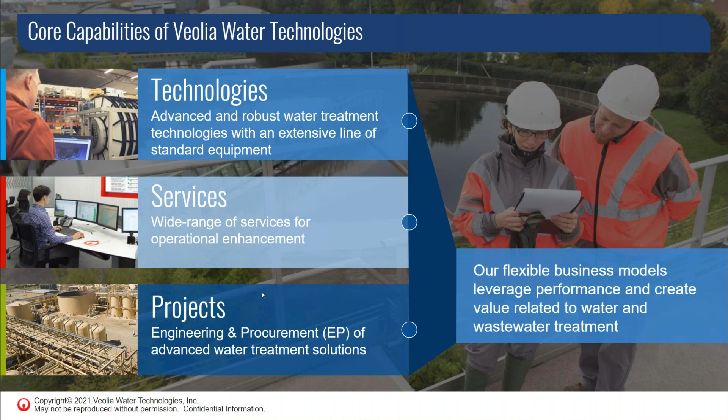When you look at our projects, we have various delivery models, really nothing cast in stone. The big focus is on engineering and procurement of our treatment systems, but again, we have many delivery models that we can bring to the marketplace. Next slide, please.

When you look at markets served, certainly today we're focused on the mining sector, and myself personally involved in mining right across North America. But as Jill mentioned before, we're also included in oil and gas, municipal. We look at pharma and food and beverage as more what we call our light industry, but also power and pulp and paper as well.

So we really do cross all the markets here in North America, and we certainly do look forward to the opportunity of working with you and seeing where we can help you out. And with that, next slide, please.

So for today's agenda, we are going to look at metals precipitation, low-level metals precipitation in mine water applications. Mark is going to take over from here and talk about the conventional water treatment plants and how we look at that from an applicable process for metals removal, the principles behind how we're proposing our water treatment facilities.

We're going to look at a couple of case studies, mine effluent treatment in northern British Columbia, Canada, and talk about how we tackled that specific application. We're also going to touch briefly on a remediation case study, where copper and zinc were involved at an abandoned ore spill site. And then we'll wrap up with a conclusion.

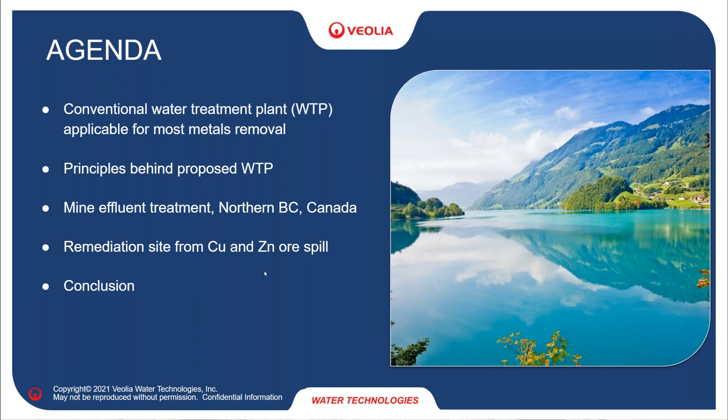So water treatment mining application, we're focusing today on sites that have to deal with excess water. I understand right now most of the southwestern US is in a drought, but actually we see that we have many locations where there is too much water to deal with, and where that water is contaminated typically by heavy metals, by TSS, the particulate solids and everything, and must be treated before discharge into the environment.

We see that the criteria to discharge into the environment are becoming more and more stringent. It's not the same all over North America, but we see that in some places levels are expected to be in the ppb, the micrograms per liter. That's not a lot. What we're going to cover today is two case studies of how we can manage to do that. We understand that it does vary from site to site, but I believe it will give you a good idea in general of how we go about that.

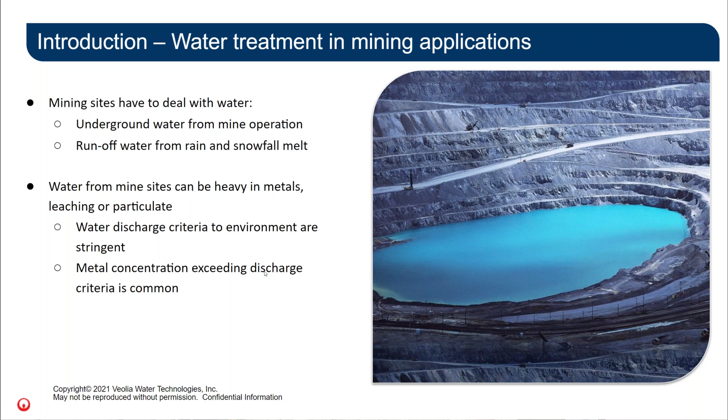So what we're looking at today is conventional treatment chain for metal removals. It's not the only thing we can do, and as Jill mentioned in the intro, we are also looking at biological processes. Biological processes are not used that much for metals—they're more used for ammonia, nitrogen, or in general organics. We're not covering that today.

We have covered that elsewhere, but just so that you know, it is part of the treatment. Today we're focusing on metal removal—how do we go about removing all those metals coming from mining sites?

So basically, when we're talking about metal removal, we will be talking about physical chemical treatment, which is basically we'll do something chemically to do a precipitation, and then we'll just use basic physics to remove the solids, and that's what we call physical chemical. That's as opposed to biological treatment, which is not covered today.

It's simple. It's quite flexible because you have a wide variety of chemicals to use. You can also be quite selective depending on what you have to remove—you can go there and actually be fairly specific. You will have little or no liquid waste. Normally what you're producing is a sludge.

That sludge, on the other hand, needs to be handled. That sludge is usually considered to be toxic waste because it does contain most of the heavy metals removed from the water. Chemical consumption can be high depending on the water quality and the criteria we have to meet. It's still fairly simple, and we can achieve surprisingly low concentrations in the treated water if we do our job properly—select the right equipment, the right chemicals. That's basically what we're going to see today.

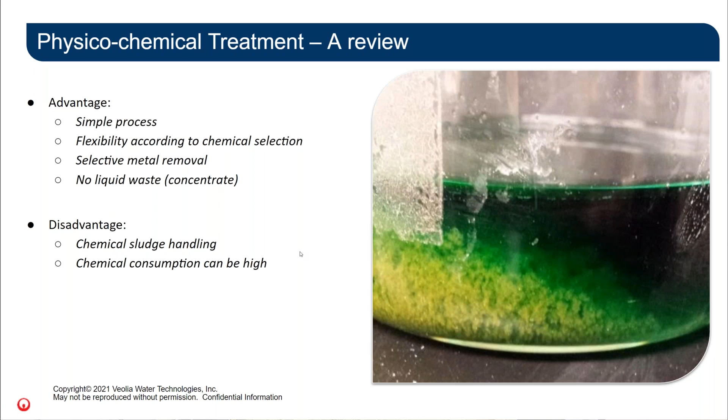So what's the idea there? Metal precipitation. We have something soluble, some soluble metal ions, and then we'll add something else to form solids. That's going to be precipitation.

What are the something else? Typically hydroxides. I'd say that's probably 80 to 90% of the cases. You would just basically add caustic or lime or something like that. But it can also be sulfides, carbonates, sulfates, oxides. There's all kinds, not to mention various organic chelatants and things like that.

We can also use surface complexation. I'm not going to spend a lot of time on surface complexation because that's a topic by itself, but the idea is that when we add aluminum or iron into water, and that aluminum salt or iron salt precipitates, it forms a solid, and that solid has a tendency to adsorb many metals. That's actually the main mechanism we use to remove oxyanions, such as chromates, molybdates, vanadates, arsenates.

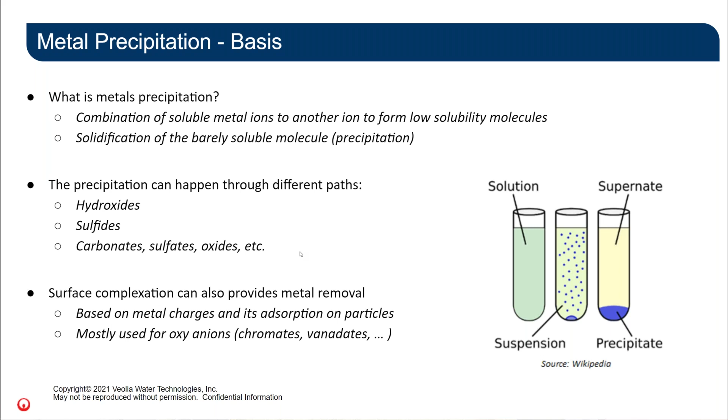All those oxyanions are typically removed using surface complexation. At the end of the day, whether I use precipitation or surface complexation, what I end up with is a solid that contains the metals that I want to remove. So once that's done, I have to remove the solids from water, because it's good to take the metals from the aqueous phase and put that into a solid phase. But at the end of the day, I must now remove my solids from my water.

Typically, the main workhorse that we use is something we call ActiFlo. ActiFlo is a clarification process that is based on enhanced flocculation using ballasted floc. What does that mean? That means we're adding sand, micro sand, into the process. We'll bind the solids that we just produced by precipitation or surface complexation to the sand using a combination of coagulant and polymer. And now we're suddenly going to have solids that are much bigger and much denser than before. They will be able to settle very, very fast.

We're talking order of magnitude faster than naturally decanting solids. Obviously, all the sand that we add is recovered. Basically, what we found is that the sand-solid mixture can be pumped and sent to a cyclone. In the cyclone, the centrifuge force is sufficient to separate the sand, which is recovered, from the solids that we produce, which now make up the sludge.

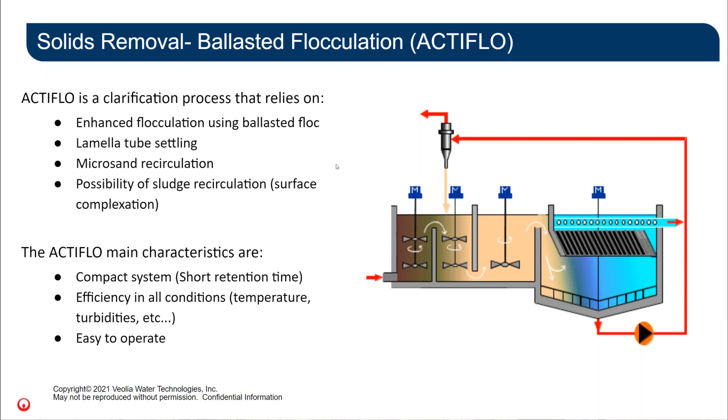The ActiFlo typically is 20 times smaller than a conventional process. This is something where we have literally hundreds of applications worldwide. It is very, very effective for that.

It does produce quite a good quality effluent, typically much better than the conventional clarifier, because you don't have the issues that you have with turbulence in conventional clarifiers. For example, the sun rising through the day will create a convection current that will give you an increase in TSS and so on. You don't have that at all in ActiFlo. So probably, as I say, 95% of the mine sites where we have a treatment plant have an ActiFlo at some point in their process.

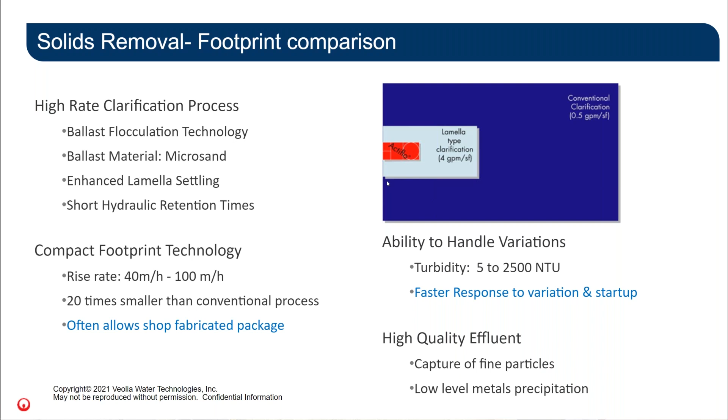So what we found is that by combining ACTIFLO with a disc filter, we can increase the solid removal efficiency of the system by roughly a factor of 2 to 3 - 3 would be pretty typical. With that reduction, the TSS going out would typically be around 3, maybe 3.5 milligrams per liter. That gives you that much more capability to remove TSS and hence to meet your total metal criteria out of the system.

This filter is a system where you have many discs in parallel. We typically use a 10 micron filter. As I say, it normally reduces TSS from 8 to 12 out of the ACTIFLO to about 3, maybe 4, after treatment.

It's gravity operation, it is very compact. If the ACTIFLO is compact, I think the disc filter is even more compact than the ACTIFLO. Super easy to use. It doesn't produce a lot of backwash, and the nice thing is that if we have a disc filter downstream of an ACTIFLO, the backwash from the disc filter can be sent back into the ACTIFLO and will be further concentrated. So basically there's no net loss of water out of a disc filter.

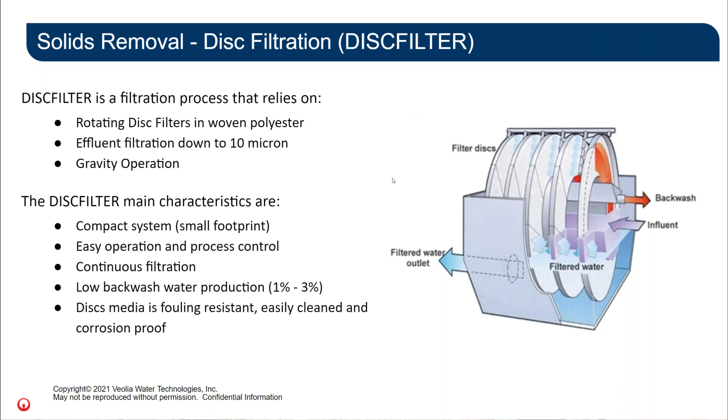It is fouling resistant, it is easily cleaned, and it's corrosion proof in the sense that it can be built in pretty much any material you can imagine. So we can usually find a material suitable for the application. Not to mean that every material, every disc filter is suitable for every application, but we can typically design a disc filter to fit. And stuff like chlorides, as an example, are things that we do very routinely - that's actually quite easy.

I've covered the basics. As I said, I'm not going to go into much more detail - we do not have a lot of time. There are things I went through very fast, like biological treatment, surface complexation, but I think that for now it gives you an idea.

I'm going to cover two different case studies. The first one is a mine that is in operation in northwest BC. What we're going to show is the results of 3 years of operation. So that's an underground gold mine. It is a very remote location - you need to travel over a glacier to actually go there. It's also very limited; the site, as you see in the photo, is cut between mountains and a lake, and there was actually very little land for the client to build infrastructure. So that's actually one of the reasons the client came to us, because they were really looking at a compact water treatment system, and also the discharge limitation, which we're going to show very shortly.

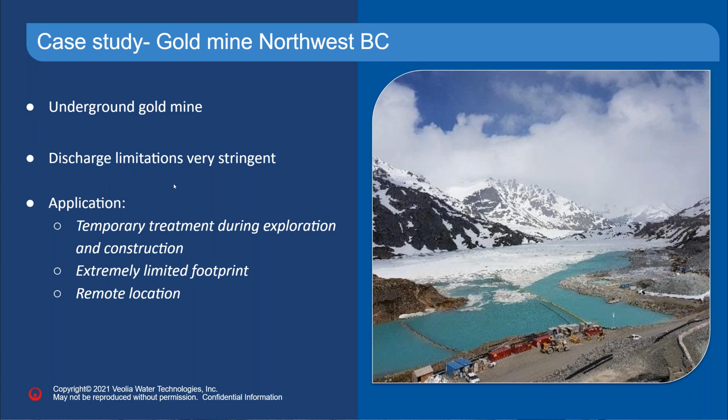Discharge criteria are very stringent. It is a pristine environment, discharging into Alaska. So there was also the complication that because the watershed actually crossed an international boundary, EPA was involved and everything. So it was kind of a difficult site.

So what we went in with there, as I said, was ACTIFLO for metal removal, disc filter for filtration. We had a breakpoint chlorination system - the reason for that was because we had a nitrite criteria; nitrite NO2 is not removed by precipitation, and breakpoint chlorination actually deals with that. Capacity is 6,000 cubic meters per day. That's a moderate plant for us, roughly 1,000 gallons per minute, just for my American colleagues, just to give you an idea.

Metal precipitation using precipitation hydroxides, and metal adsorbed by surface complexation and the disc filter. If you look, you've got various parameters there - you have the criteria we had to meet, and as I said, some of those criteria, like 0.12 microgram per liter for cadmium, or 0.1 microgram per liter for silver, or 2.5 microgram per liter for lead, are actually fairly strict.

Some of the metals are removed by precipitation, like copper and cobalt. Some of them are removed by surface complexation, in this case arsenic and cadmium come to mind. I think that's about it.

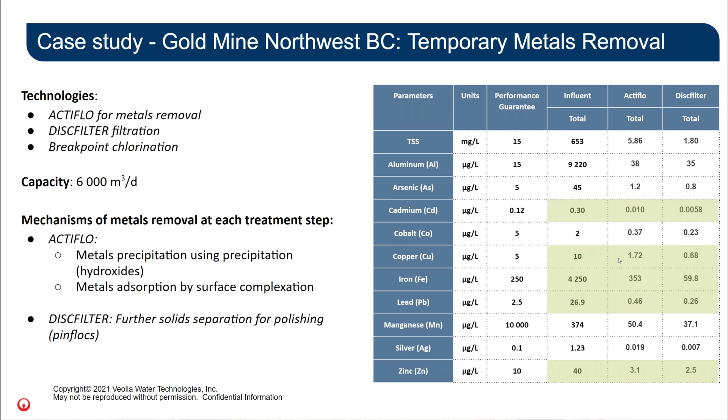Even if there is an upset in the operation of the ACTIFLO, because of some kind of mechanical failure or whatever it is, this filter is there. It's kind of catching errors, basically acting as a goalie, making sure the client can sleep at night and easily meet their criteria.

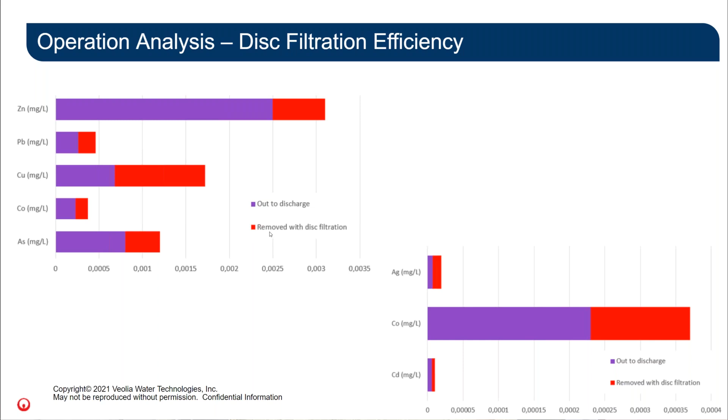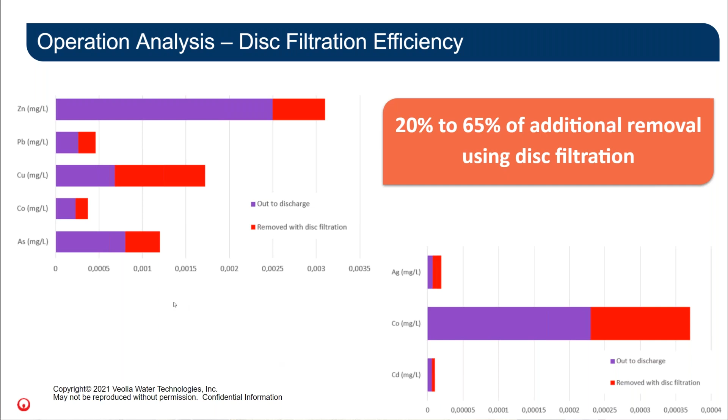Let's just look at what this filter is doing, and that's what this next slide shows. We can see that the disk filter actually removes a fairly good part of what is left after the ACTIFLO. Depending on the metal, like zinc, maybe a little less, like 20%, but in some places like copper, it's more like 65%. Silver is also closer to 65%. Cadmium is about half and half. So you can see that the disk filter is fairly effective at doing that final polish to make sure we are meeting the discharge criteria.

Conclusion for that case study: very, very robust performance. The feed water, I didn't mention, I apologize, I forgot about that. Feed water was extremely high in solids, repeatedly above 10,000 milligrams per liter, that's 1% solids. It's not the sludge yet, but the system operated very well, very robust, and achieved very low metal concentration in the treated water even with that.

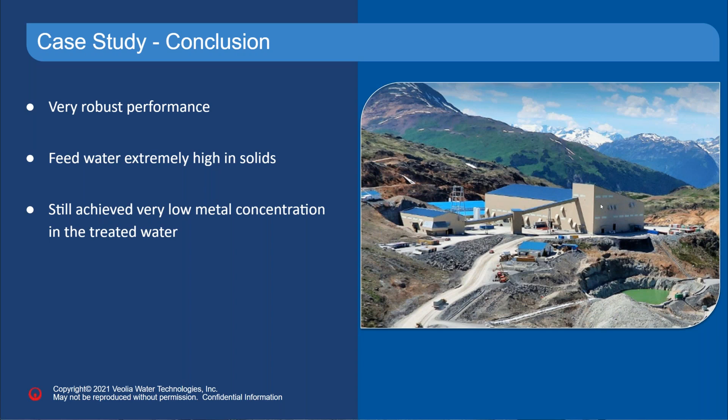That's, by the way, a photo of the mill. As said, there's no room, basically it's very, very small. That's one of the few mills I know that's actually multi-story. The treatment plant is in the mill, and that mill is actually 3 stories high, one of the few water treatment plants I know that has been built on a multi-story building. There's simply no room at that site.

Next case study, it's quite a different context. It's a site where we had a copper and zinc ore spill, and that's the result of 2 years of operation.

This is confidential, but let's put it this way: there was an accident and some zinc and ore concentrate was spilled in a waterway in a pristine environment in Ontario. That site was remediated, but the remediation was not sufficient, and then they had to go back and do a final site remediation. Discharge limits were extremely stringent, much more so than we usually see in a mine operation, but that's because of the very pristine nature of the spill.

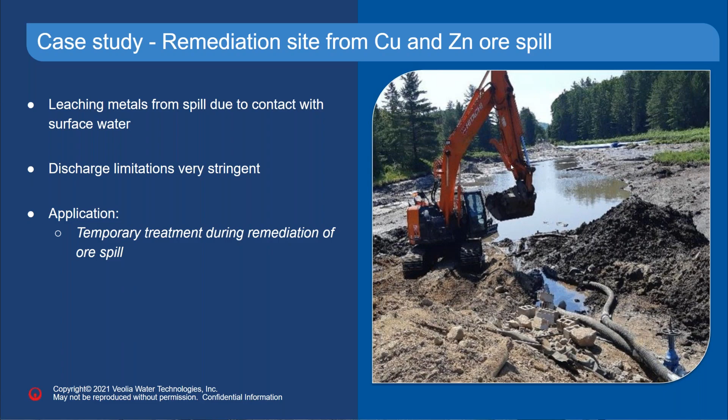So what we have there again, ACTIFLO, disc filter. In this case, we had also GAC filtration. GAC filtration was required for removal of some of the metals that were forming organo metal compounds. I'm not covering that today, but it's an option we have when we find that, because some of the metals have a tendency to combine with organic material to form soluble metals, and obviously soluble metals are difficult to remove.

It does happen. It's about the same flow as the other we had, same basic process. Again, as I said, that's probably 90% of what we do. So metal precipitation using hydroxide and then metal adsorption by surface complexation, disc filter and GAC filter.

So we go there. If you look, same idea there. So we have the various criteria. We're showing stuff where we had no criteria, but it's still interesting to have a look. And those are average values in this specific instance - that's actually an average over 2 years of operation.

So you can see, say it's copper and zinc. We had also a lot of aluminum in the water. Aluminum is not the easiest metal to remove, to be honest with you. And we had the 75 ppb criteria for aluminum, so that one was a little bit difficult to meet there.

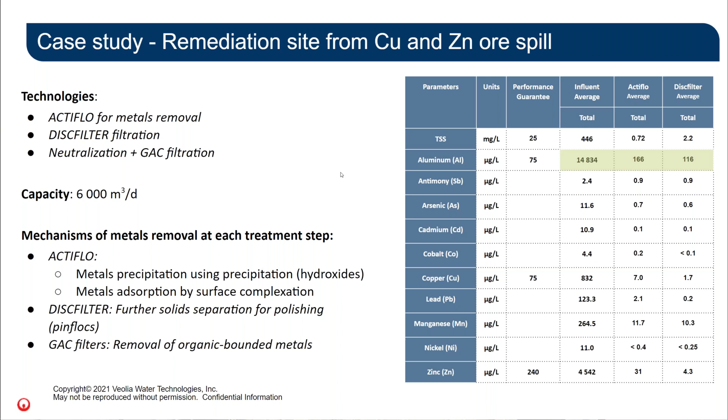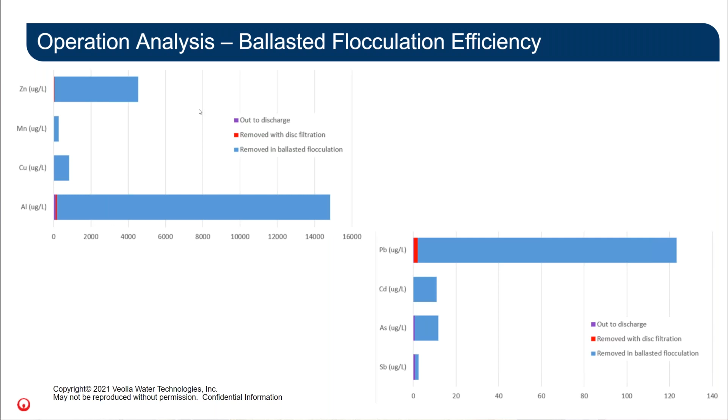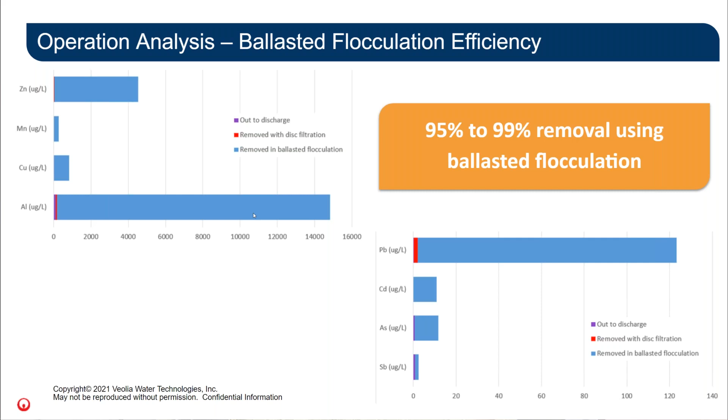Same thing with copper there. So that was actually a very successful system that we used. We have the same kind of graph there where we can see what was removed. Obviously aluminum, a lot of the aluminum - most of the metals in general - are removed into the ACTIFLO. Disc filter will remove some, but as you can see there, we go with, in this case, 95 to 99% removal with the ballasted flocculation with the ACTIFLO system.

Again, focusing on the next step because we can't see anything on the previous slide. Just looking now at the disc filter. The disc filter also does remove some metals with fairly good efficiency. Obviously depends on what's the situation.

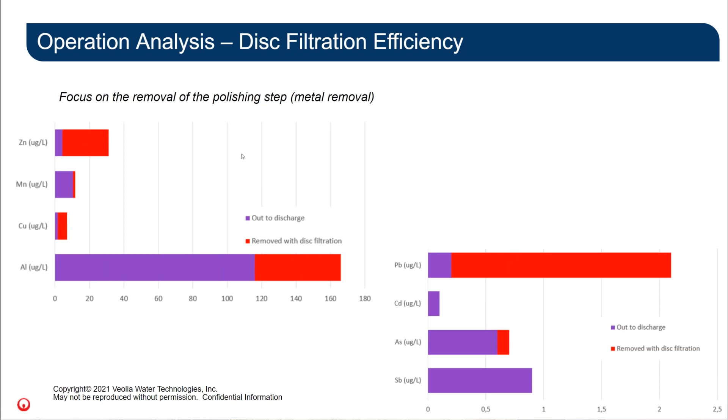Like antimony in this case is interesting because antimony at that point was soluble. So because it is soluble, disc filter will not do anything. But lead and aluminum and zinc, as an example, are mostly particulate, and then the disc filter was actually quite efficient at removing those metals.

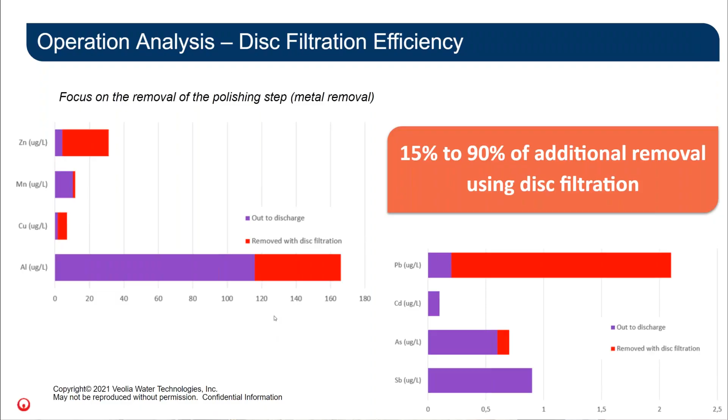So as you see there, except for antimony, because there was no removal, when there are solids in the system, we go there with like 15 to 90% removal using the disc filter. Good performance. Client was very happy with this.

It was kind of messy, as I said, like any site remediation there. It's always a construction site, so you've got heavy machinery there and a lot of mud, everything. Disc filter allows us to actually meet the criteria, and without the disc filter, I must say that we've had some upsets in the operation. The disc filter really helped in smoothing those upsets and making sure that we could continue discharging water.

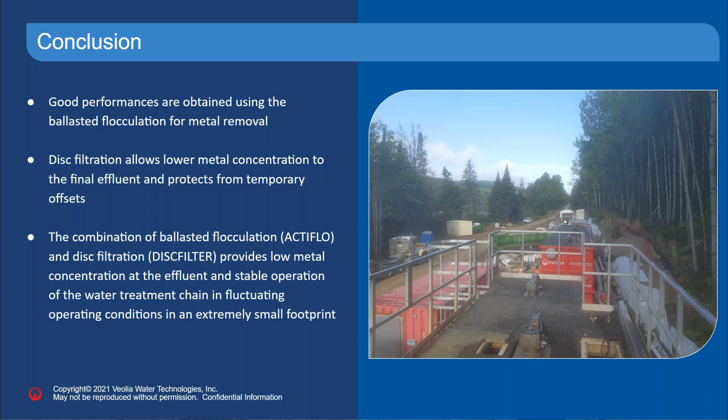And that gave us a very stable system in a very small footprint. I'm not sure if the picture is very good there, but as you can see, basically we're on the side of a road there, and we had to park. All the treatment system there is basically parked one behind the other, and that's the space we had for doing that remediation. So that's basically, maybe 8 or 10 meters wide, call that 30 feet. And that's it. That's all the space we had, and let's say it's extremely small footprint. Yep, that's the space we had, and that's how we operated the system there.